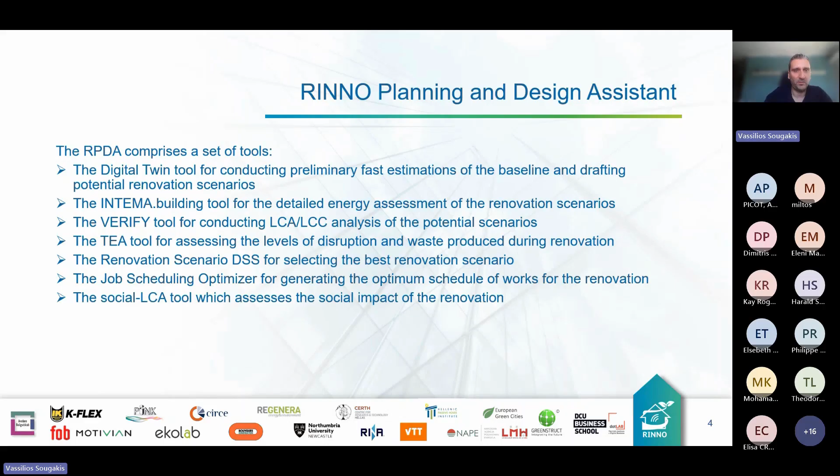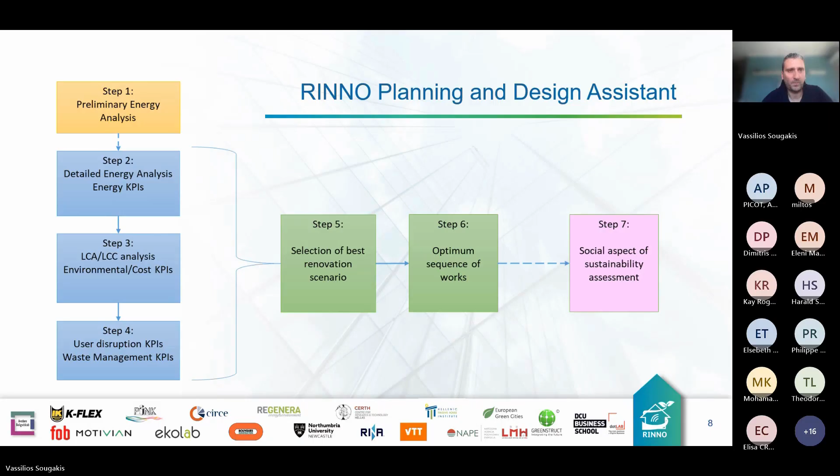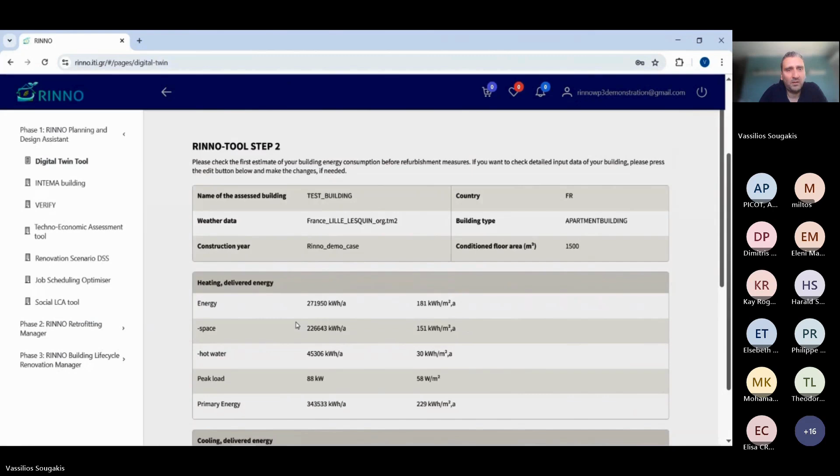This is a tool that has been developed by VTT, which is a partner in the RINNO consortium, and has been designed in order to provide some quick estimation of the building components by using minimal available data. So it has been parameterized in order to enter specific brief information, and it's able to deliver immediately, based on the parameterization for each country, some loads regarding the energy, the heating, cooling, energy consumption, domestic hot water, etc. So that was the first result.

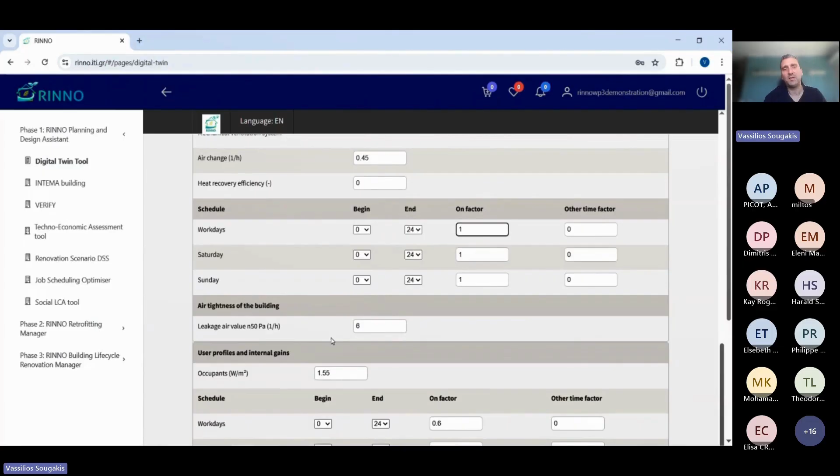As we're moving on, we can also click in order to change some parameters and give a more accurate description of the building, and of course obtain more accurate results. So we can change different parameters such as the window sizes, the schedule, the air tightness of the building, the air change through ventilation, as well as the occupant profile. Also the U values of the building walls, of the building components.

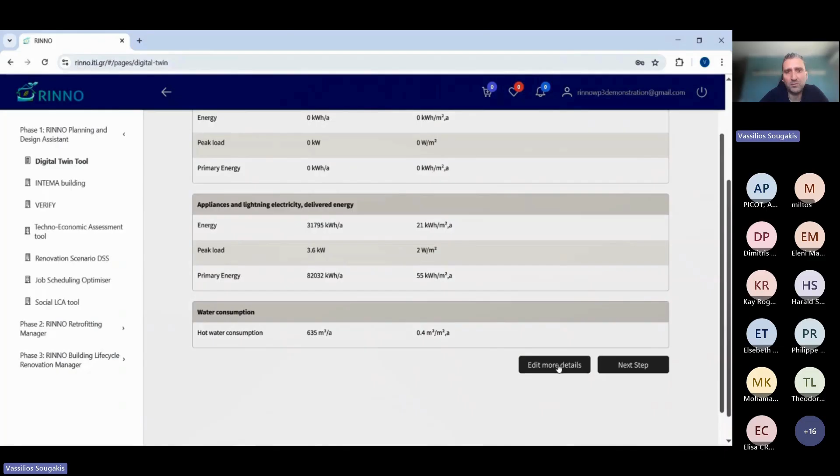And if we change that, we also get an updated result, which is more representative of the building under consideration. We can do this process and then save details, and this will lead to the update of these values here, of these key performance indicators. Here we can see the estimated heating and cooling load for the building. Once we're happy with that, we can proceed to the next step, where we can consider specific measures for improving the building performance and for generating the renovation scenarios.

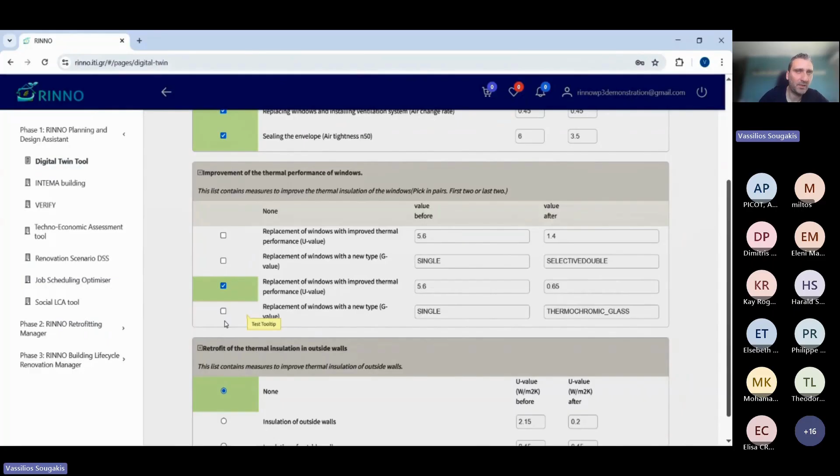So we have some predefined renovation measures, which we can select, and this will update the building and recalculate the performance under the renovated state. And then there's going to be a comparison between the performance of the renovation and the baseline of the building. Additional improvements may consider the hot water system, a PV, some solar collectors, as we see here, upgrading the HVAC system, etc. Also considering some auxiliary heating system.

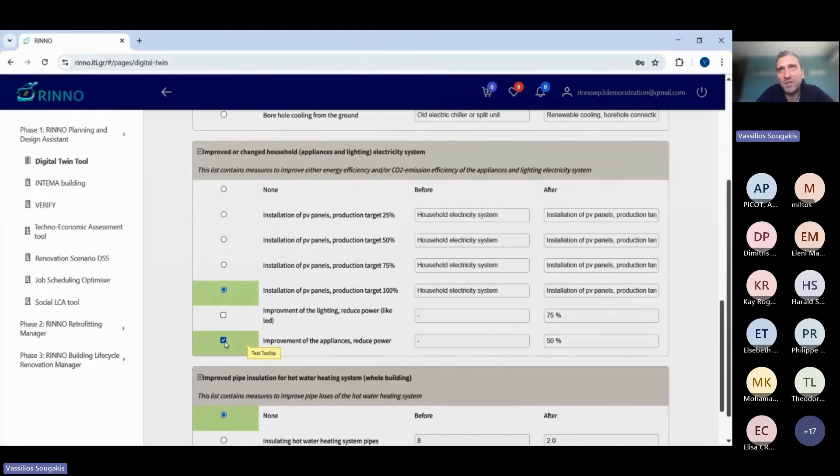So this tool has been designed in order to provide a quick estimation of the baseline condition of the building, as well as the renovation, using minimum data, which is basically what we have at a preliminary design stage, and we can get a fairly accurate estimation of the energy consumption of the building before and after the renovation.

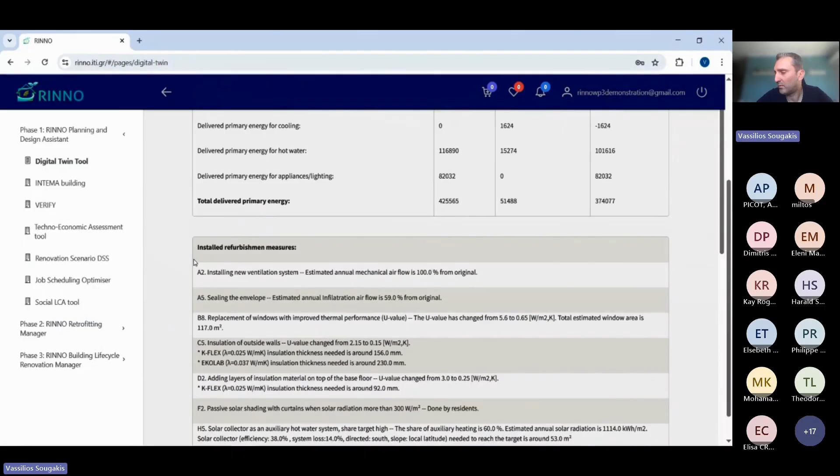I think the main strength of this tool is the speed of the calculation, the fact that we can quickly consider various renovation scenarios and various renovation measures and get an estimate of the energy consumption, and also the accuracy, which has been tested and evaluated during the implementation of the RINNO project, where we compared the results of this tool with the next one, which is the Intema building, which conducts the detailed analysis, and it has been shown that there is a fairly good agreement between these two software.

So using this application, we can have a quick estimation of the building performance, and we can have the figure where we can be sure, we can be quite certain that it is a representative figure.

Now, moving on, after conducting the simplified analysis, the preliminary analysis, we can then move on to the next tool, which is the Intema building, and this conducts the detailed energy analysis. So with the Intema building, the idea is that we first do the digital twin tool and we consider several renovation scenarios. Then we select the most promising ones and we assess them in detail using the Intema building tool. This is the layout.

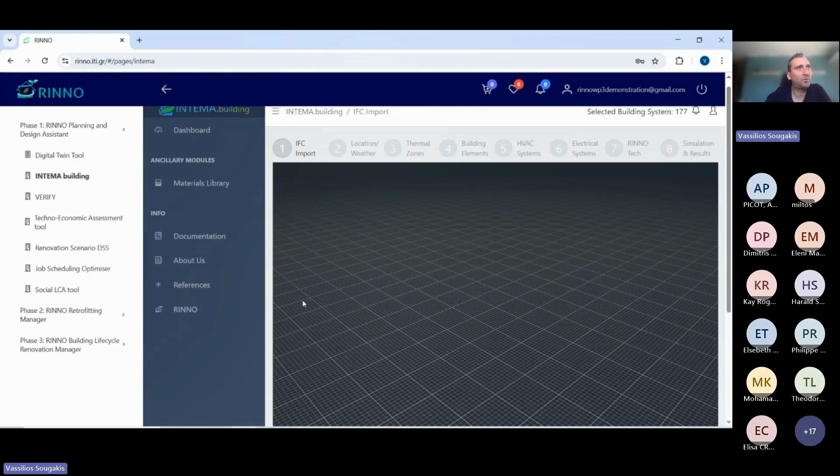We can access the tool again from the left-hand side of the platform. Here we have run a few cases where we have the baseline as well as a few renovation scenarios. By clicking on this button here, we can access the tool, and the first thing that we see is the screen where we can load the IFC model, and if we have a BIM file, we can upload it in order to conduct the analysis by using all the data from the BIM, which saves us a lot of time.

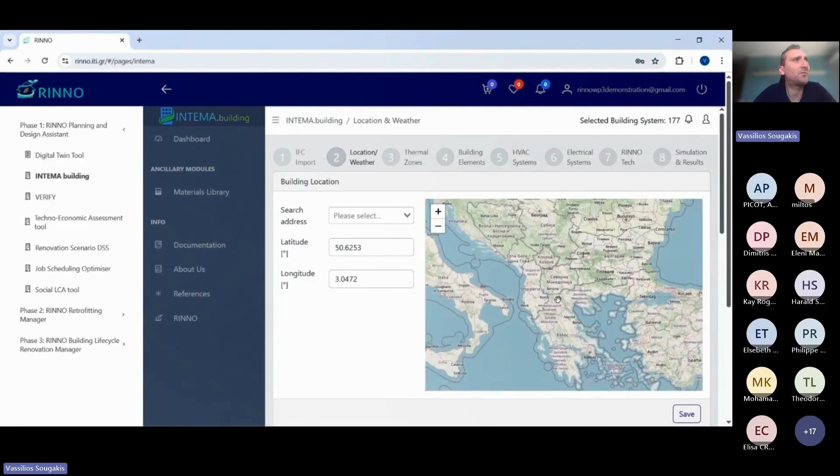Here we have a case from one of the demo pilots of the RINNO project. Once we're happy, we can upload it and move on with the analysis. It should be noted here that we can do the analysis using the Intema building tool regardless of whether we have a BIM file of our building or not. So if we have a BIM file, this will save us a lot of time by importing the geometry and the thermophysical properties of the building. If not, we can do this process manually.

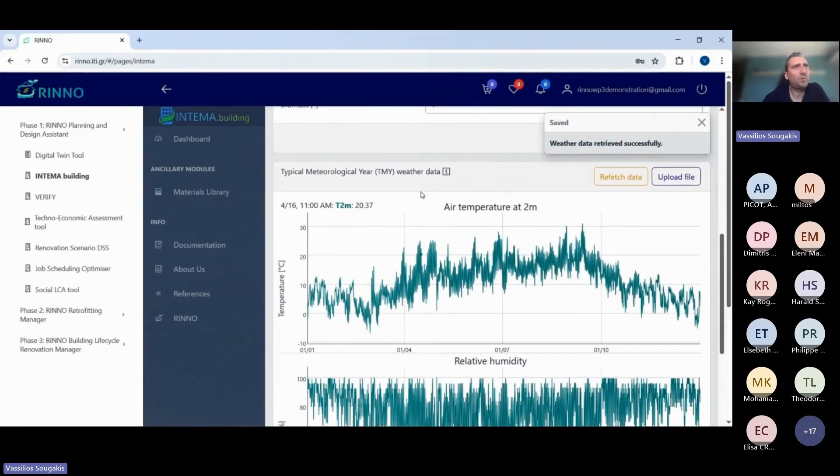Next step is we select the location. We have a pre-selected one, which is Lille in France. After selecting our location on the map or by entering coordinates, we can refetch the weather data. We can load the weather data, and we get a message that the weather data for this location have been uploaded successfully, and this enables us to conduct the analysis. Moving on to the next step.

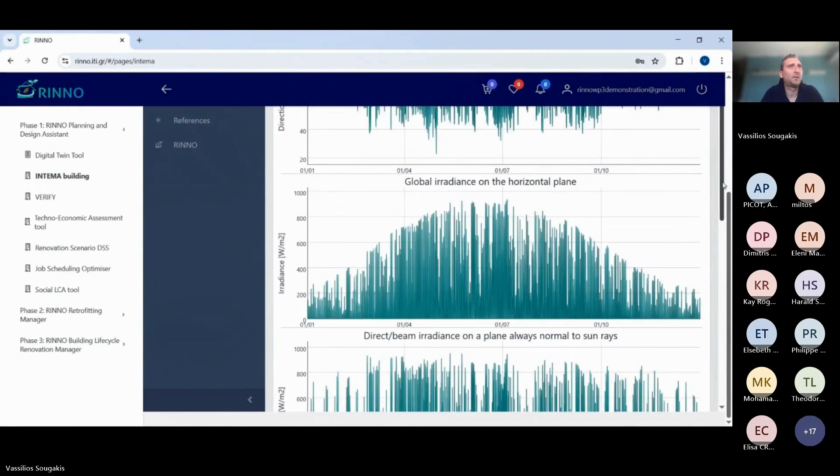We then set the parameters for the thermal zones. In this case, we can see them once we import from a BIM file. Also, we can make the screen larger. We can take out the left-hand side panel in order to make the view better, larger. And then we can edit. We can set a new zone, or we can edit the zone here. We can select if we have a single zone building or a multiple zone building.

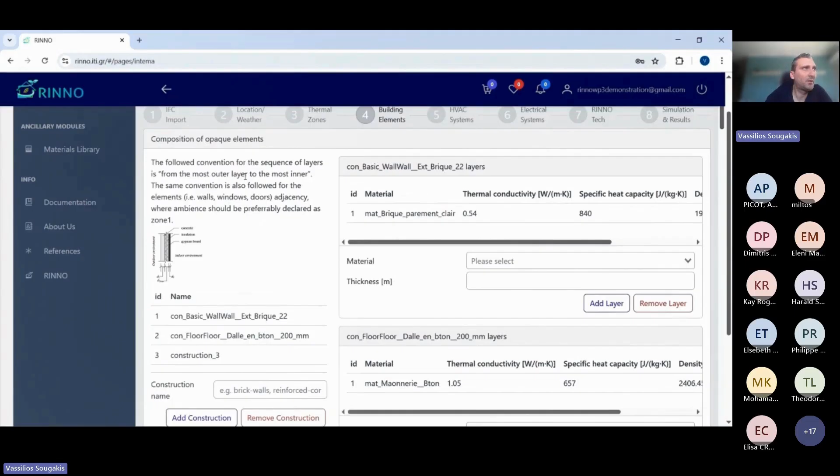This is imported from a BIM file, as well as moving on to the next step where we have the building elements. This is where we define the building elements for the case study that we're examining. So in this case, there are materials that have been imported from the BIM, and these are the defined constructions. So first we define the construction that we have on the building, and by constructions we mean the materials for the walls, the floor, and the ceiling slab. And then we define the walls.

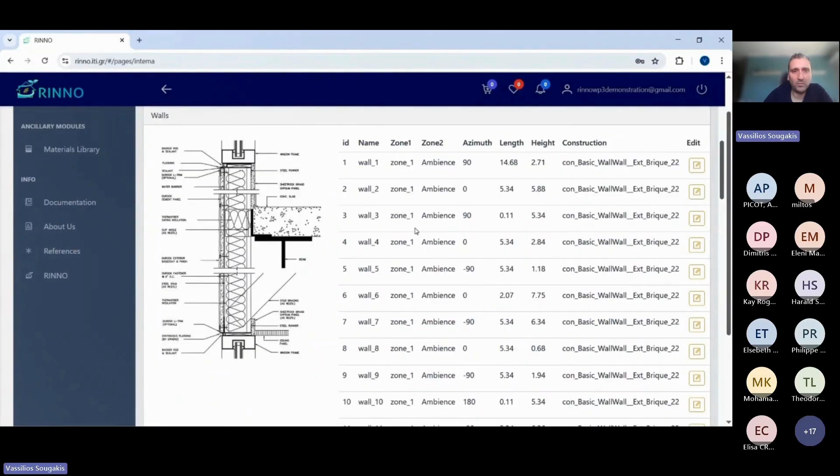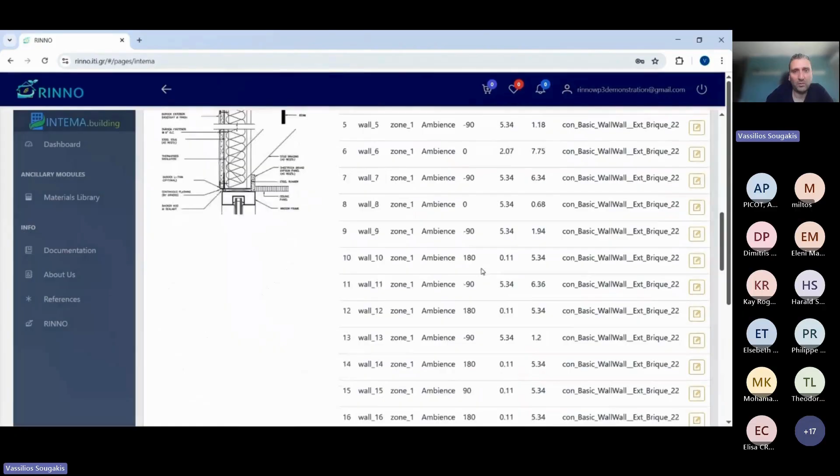So this is a case where this has been imported from the BIM file, but if we didn't have a BIM file, we could just define the geometry by entering the details of the walls. And then we can include information and assign the relevant construction. So the construction from the previous step is assigned to the building. As I said, we can also create a new wall and define which zones it is in contact with. It can be in contact with the air, the ambient temperature, or with an unheated space or a heated space where there's no heat transfer.

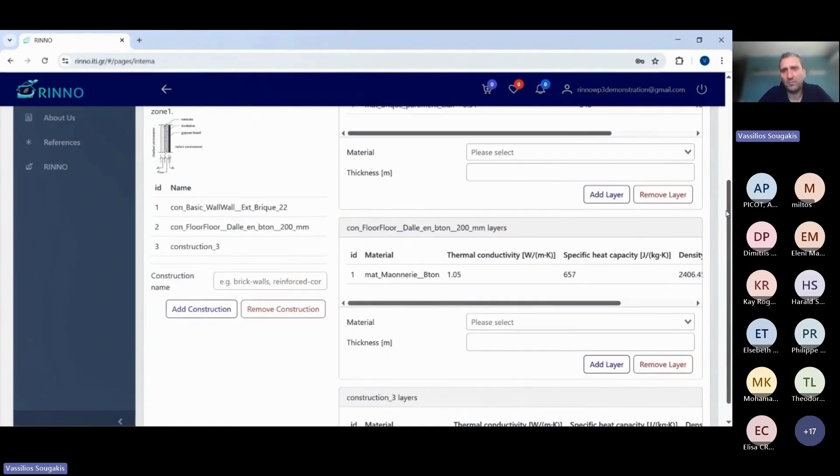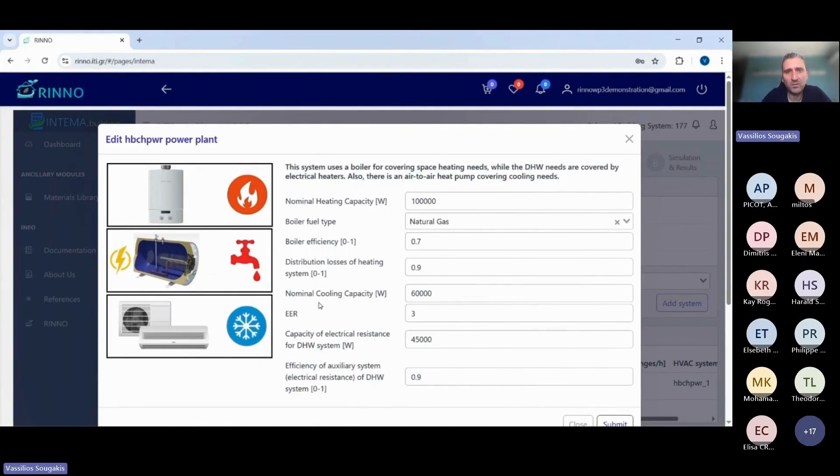And similarly, we do the same process for the windows, the roofs and the floor. We define the geometry of the building as well as the materials. In this case, we have defined the whole building envelope. Having done that, we're ready to move on to the next step, which is to set up our heating and HVAC systems. In this case, we're considering a boiler for space heating, domestic hot water is provided by electrical heaters, while there's an air source heat pump for providing cooling.

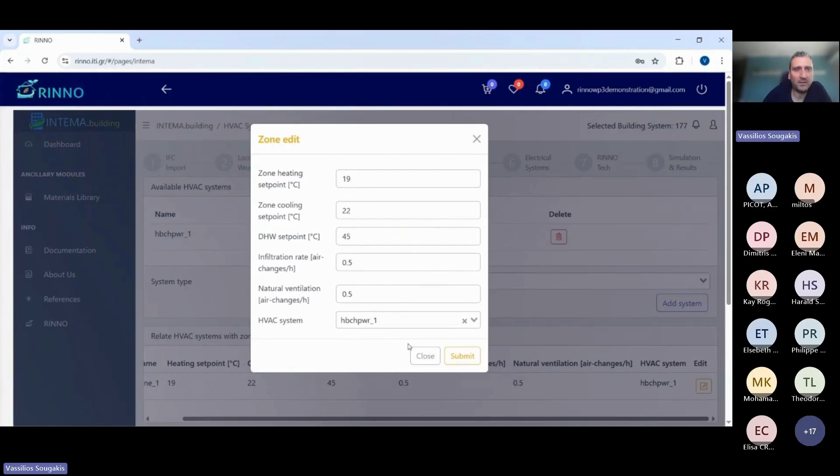Also, we can select and set up different combinations of HVAC systems for heating, cooling, and domestic hot water. And at the bottom, we also set specific information regarding the zone parameters, such as the cooling set point, the heating set point, the thermostat, infiltration rate, etc. Also, how many people are in the zone.

Moving on, in this stage I can also assign electrical systems, such as renewable energy sources, as well as specifications for the appliances. So we're defining all the electrical loads and electrical systems of the building. When we're happy with our setup, in this case, we can see how we can set up a photovoltaic (PV) system.

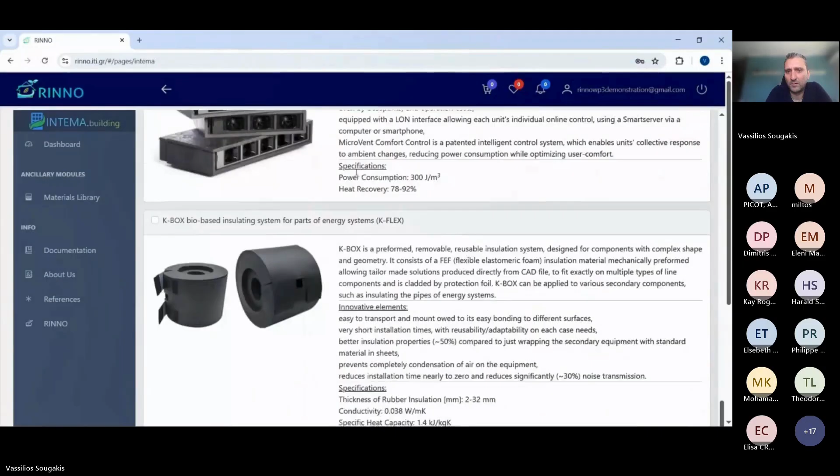And then we can move on to the next step, which, particularly for the RINNO project, includes the RINNO technologies, where we can select them and parameterize them in order to be considered for the renovation. We can see the different systems that have been developed in the project. We can select a few of them, and then, moving on, we can conduct our analysis.

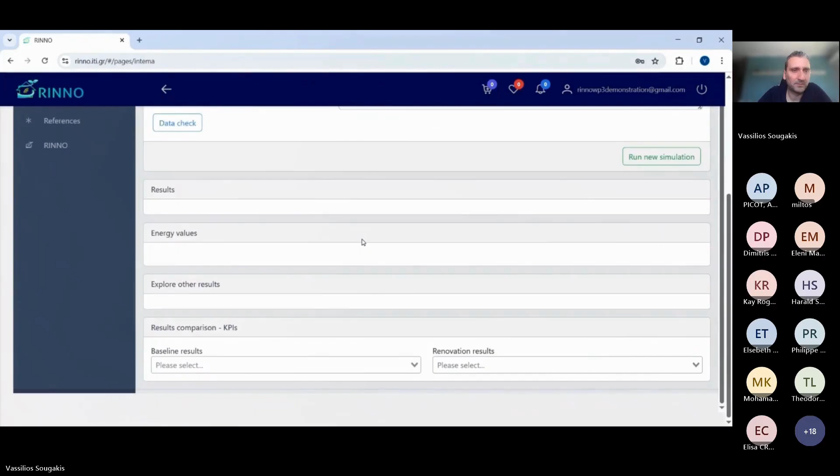Clicking on the left-hand side, we can click the simulation bar, run new simulation. In this case, we're loading some pre-loaded data for reasons of time restrictions. And we get the results based on how we define the building performance, the building operation, the thermostats, the heating and cooling systems.

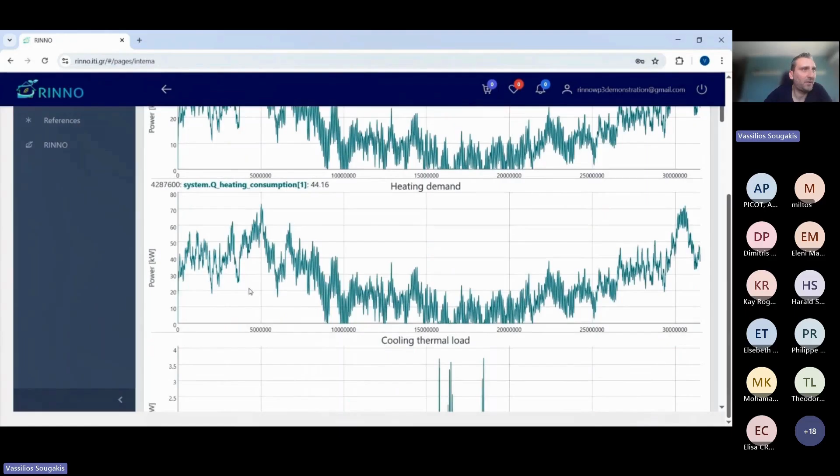This calculates the heating demand, the cooling demand, as well as, if available, renewable energy production, as well as the demand for domestic hot water, etc. And then it also calculates the KPIs for our buildings, such as the heating load and demand, cooling thermal load and demand, as well as domestic hot water.

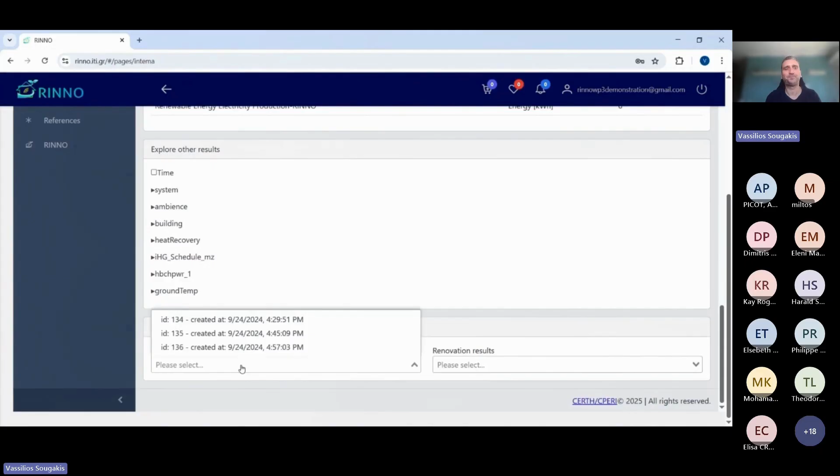And finally, we can also assess the different scenarios. So in this case, one is the baseline and the other is the renovation scenario. And we can see specific KPIs that have been calculated, such as the decrease of heating and cooling loads, as well as savings in primary energy consumption, heating and cooling consumption, etc. And these are the so-called energy KPIs, which are considered in the analysis, as I mentioned earlier.

All the tools of the RINNO planning and design assistance are working together in order to conduct not just an energy analysis, but a multi-criteria analysis, a holistic analysis for the renovation. And this was the process for the building energy analysis. Once we are happy with that, we can proceed to the next software, which is the Verify platform. Again, we can make the screen larger in order to view the results better.

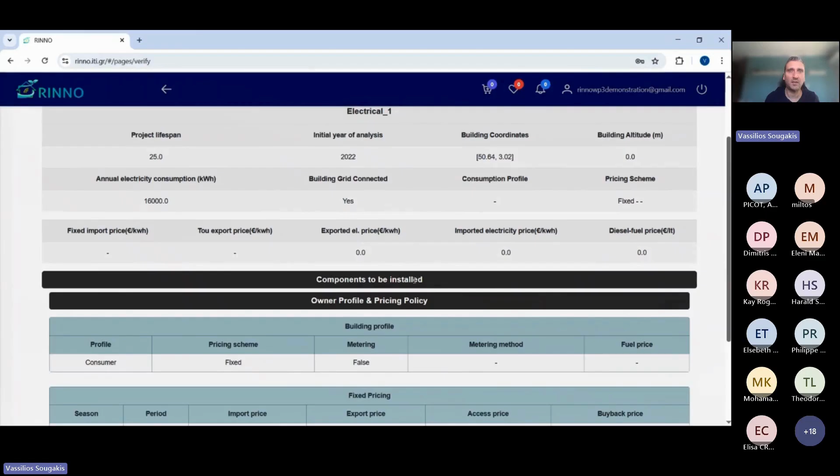So the way it works is, from the left-hand side, we can see the plans and the option to construct a full project. In order to conduct the analysis, we need to set up an electrical plan, which we see here. This considers all the electrical systems and consumptions of the building. We can review it first, and then we can also edit it. So we can set the project lifespan. This includes information such as the project lifespan, the year of the analysis, and the latitude and longitude of the building.

Then we can define some renewable energy systems, such as a PV, which we do here. This involves setting the type of the PV material, the mounting system, as well as the tilt angle and the azimuth. Similarly, we can also set up a small wind turbine, or we can also include some batteries.

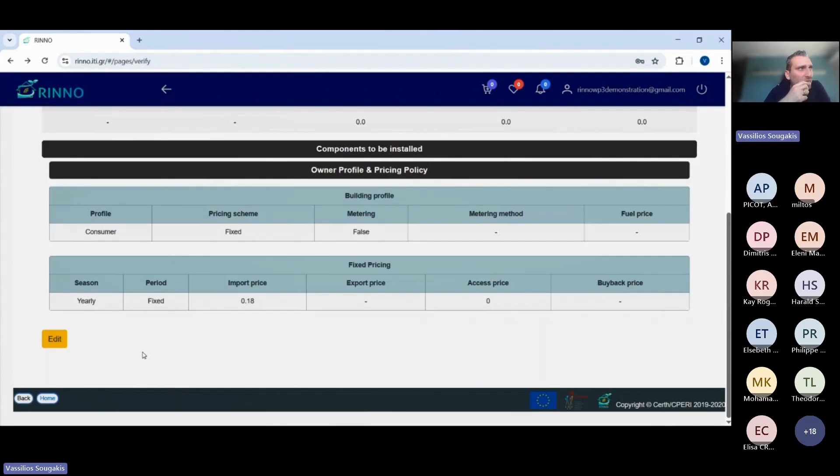So after the electrical plan, which involves all the electrical appliances and electrical consumptions, we also set up a thermal plan, and this involves information regarding the thermal components and the thermal consumptions of the building. First, we set up the name of our plan, and then we have the floor. We set up parameters such as the floor surface of the building and the floor height, and we set up the construction, and then we consider the different heat systems before and after the renovation.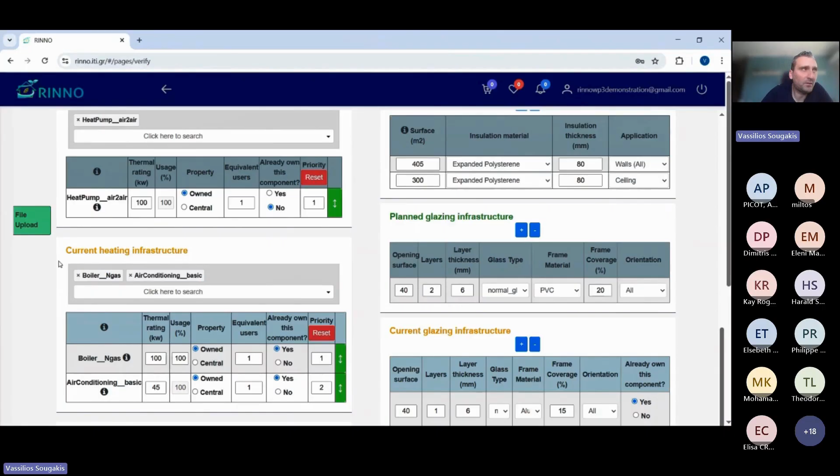Here we have set up basically what we were looking at earlier. In the baseline, we have a natural gas boiler for domestic hot water, and then an air source heat pump for cooling. We're also setting the equipment for heating and cooling before and after the renovation.

So we're defining the heating systems before and after the renovation, as well as the passive components, which you can see on the right-hand side, which involve insulation, glazing, as well as any storage for domestic hot water. In this case, we're considering double glazing after the renovation. Before the renovation it was single glazing, as well as insulation on the walls.

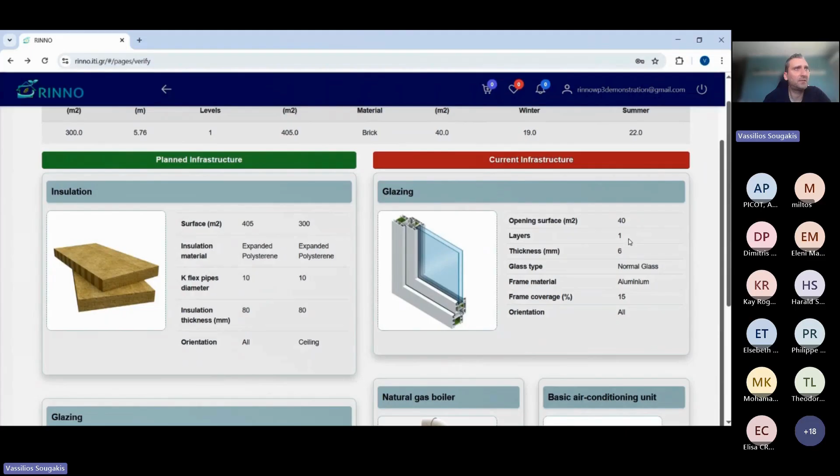The tool for all these components has a database where we have values for the life cycle assessment and life cycle cost of these components in order to conduct the LCA and LCC analysis. So we can review our scenario, the renovation scenario. We can see on the left-hand side the renovation scenario, and on the right-hand side the baseline, the components that were still on the baseline. We can review it, and also we can make any changes if needed.

So the last step is to define the investment plan, which is defining some indicators, some crucial inputs regarding the economic factors, such as the VAT, inflation, electricity tax rates, the weighted average cost of capital, etc. Also, we can define if there is a loan or not, and if we need to also purchase the land that we are doing the renovation on or not, as well as additional costs that can be included in the life cycle costing of the renovation.

Moving on, we can construct the renovation scenario, comprising the electrical plan that we conducted, the thermal and the investment plan, and then we can conduct the analysis. So once we click develop scenario, we can see it's included in this full project. So by following these steps, we're constructing a project, and then, in order to do the analysis, the VERIFY tool is requesting data from the previous tool for the energy use phase of the building, and we're ready to conduct the analysis.

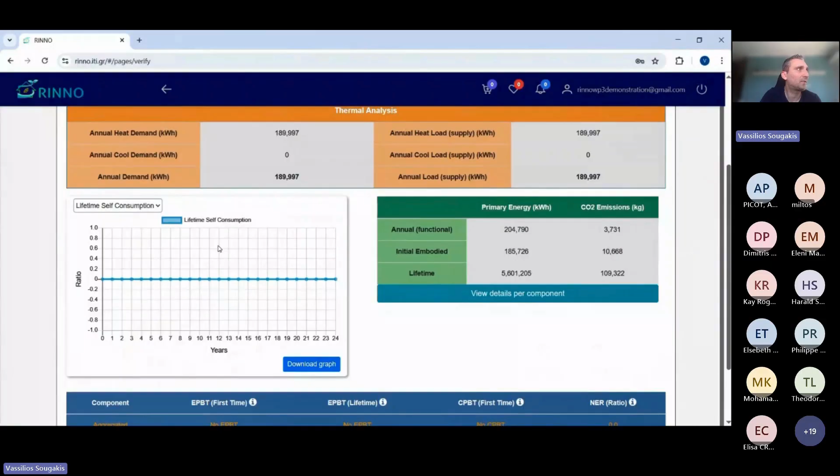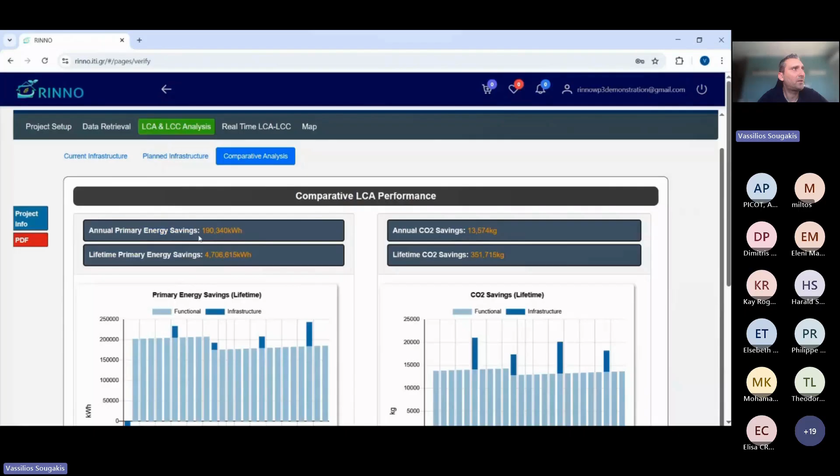So the setup that we did in the previous stages considers mostly the installation stage and all the embodied energy and carbon for the installation stage, and then we request data for the use phase of the building. And by clicking Run Life Cycle Assessment, we can see the life cycle assessment of the building during the baseline, during the renovation, as well as a comparative analysis on the primary energy savings on an annual basis over the lifetime, as well as CO2 savings that are expected from the renovation during the lifetime of the building, as well as a few graphs that facilitate the assessment.

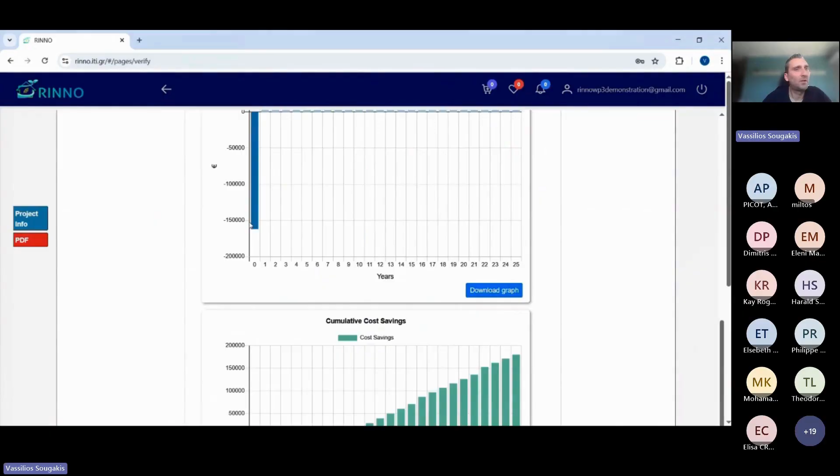Following the same process, we conduct the life cycle costing, and here we can see some cost analysis, the life cycle cost, initial investment, operational cost, etc., for the existing condition of the building if nothing changes over the lifetime that we're considering in our analysis, or during the renovation, where we see again the initial investment, the life cycle costs and the operational costs, and then a comparative analysis which shows us some financial indicators such as return on investment, the initial annual cost savings, investment payback time, etc.

So following these steps, we have concluded the analysis, and we can send the KPIs to the next tool of the RINNO planning and design system. The next tool in the process is the techno-economic assessment tool, and for that I would like to ask Jairis if she's available to do the presentation.

Hello, yes, I am available. Hello, everyone. Okay. Elisa, could you please make me a presenter so I can share my screen? I can do it here.

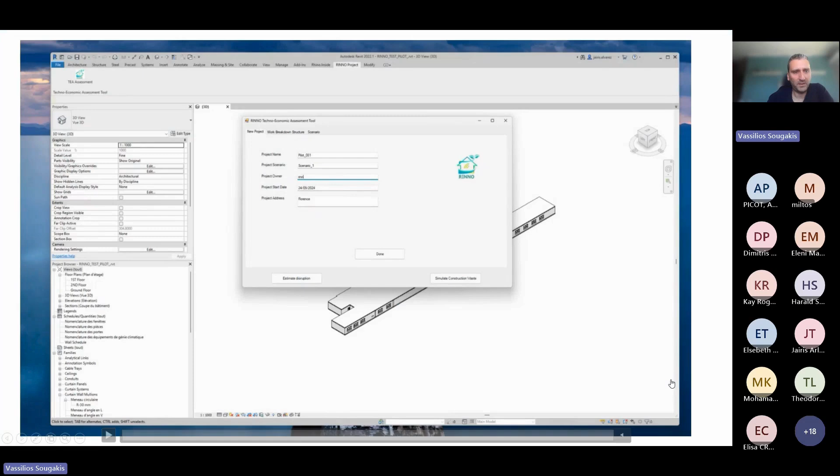Ah, yeah, okay. Perfect. So basically this is a desktop application where, from the left-hand side, we can access the tool, download it and then use it as a plugin in Revit. I have included it here. Okay, perfect. So in here you can see the tool, which is a plugin in Revit. You can see here that we have a case study. So a one floor building, with a flat roof and windows. We tried to make it as simple as possible so we can show you.

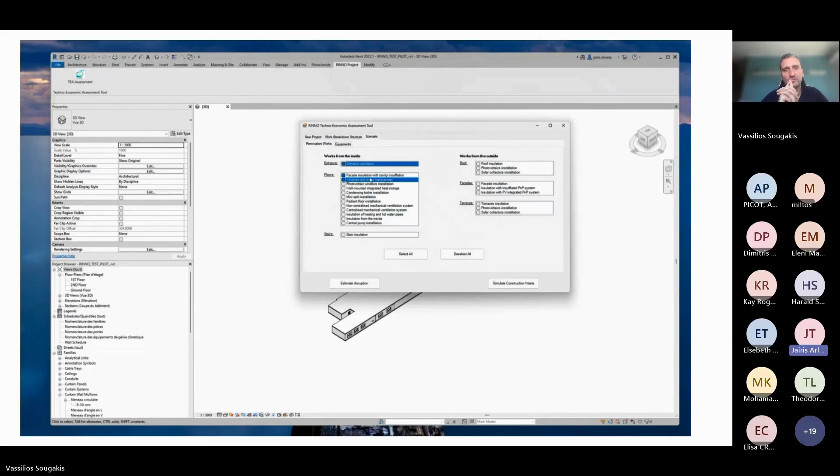Okay, then we click on the TEA tool. This will open a window in which you need to choose the name of the project, the scenario, and the start date and the end date. You also need to choose the scenario. So for example, in this one, you will have the facade insulation, photovoltaic panels, among others. Then you click on the estimated disruption and the simulation of construction waste, and it will give you an Excel file, which later in the video you will see. The most important thing when you are creating a new project is to choose the correct date, because the tool will read that date and also will read the elements from the BIM.

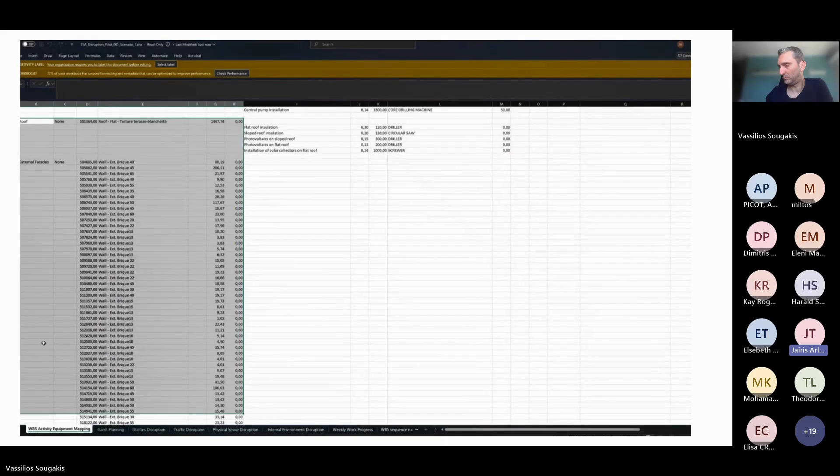So here you can see the Excel file, the project name that we have already pre-selected before, all the elements from the BIM model. So you can also do further calculation with this. We see the activities and also the equipment related to each activity. You can see also the difference on the different element for each part of the project.

So the roof, then on this side you will see the utilities, and obviously here there is a minimum impact because we have photovoltaic on the roof, facade insulation, windows and door, so you don't have a lot of physical disruption. Mostly the physical disruption will be for the site preparation, because as you know, we have a space where we need to put the materials. Then this one is more about the activities in each floor and how many rooms it has.

And this one is the Excel file for the waste. It tells you the waste that was generated in the project and also according to the date. So you can see here the KPIs of the waste, the average workers, and again the activity sequence.

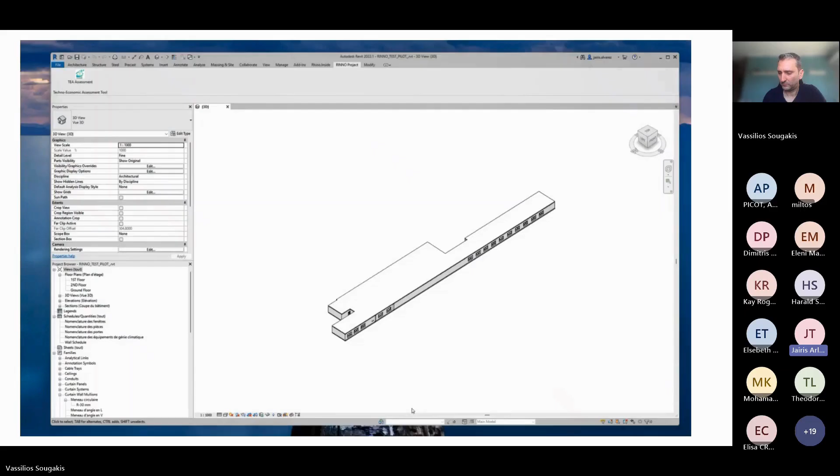And this is the TEA tool, and it gives you a preliminary stage of how long a project can take, and also a way to talk to the stakeholders or also the occupants on the building, so they are aware which days the renovation is going to take place and what is the impact of the disruption from 1 to 4. Thank you.

Thank you, Jairis. So, yes, I am done.

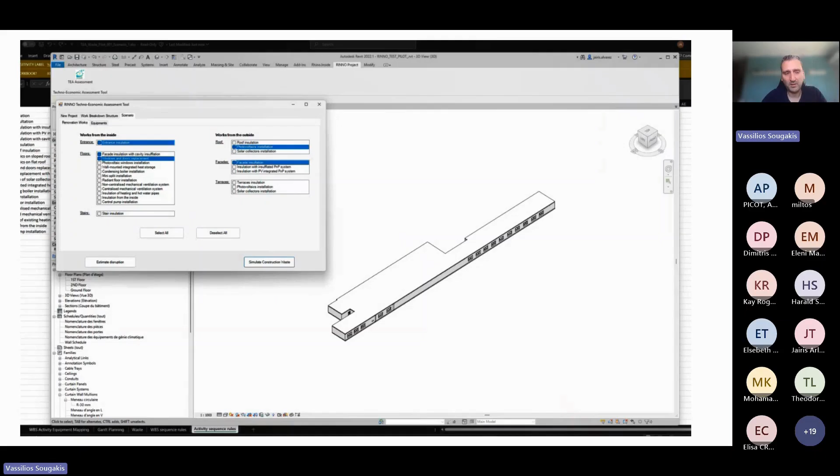Using the techno-economic tool, which is, as far as we know, a unique tool so far. There's no similar tool that can do these calculations of the user disruption and waste management. And we use these results of the analysis, how much disruption is expected during renovation and how much waste, for the selection of the optimal renovation scenario. And this is done in the next tool that we will see, which is on the left-hand side here. It's called the renovation scenario DSS. So this is a decision support system.

Basically, for different scenarios, all the analysis that we did using the previous tools, all the results are loaded in this tool here, and we can rank the scenarios. We can see all the results for different indicators. The indicators are categorized in different categories. We have environmental, energy, cost and financial, and user disruption. We have different KPIs in each category, and the user may also select which key performance indicators are more relevant. If they want, they can remove several key performance indicators in order not to be taken into account in the analysis. And also we can change the category weight.

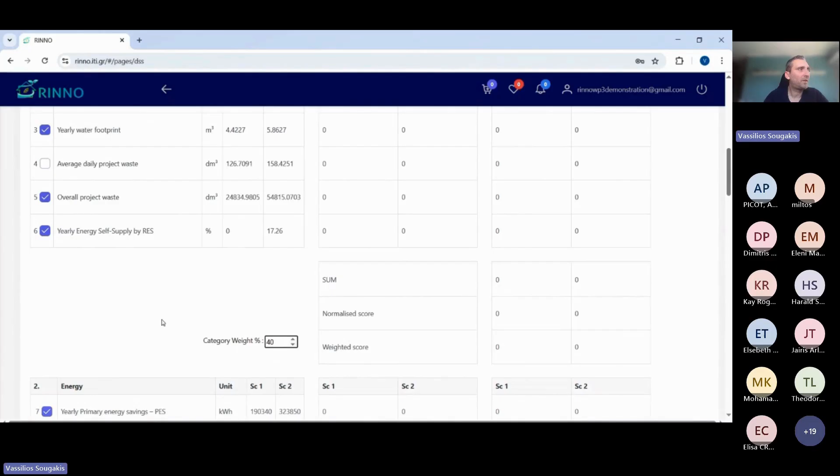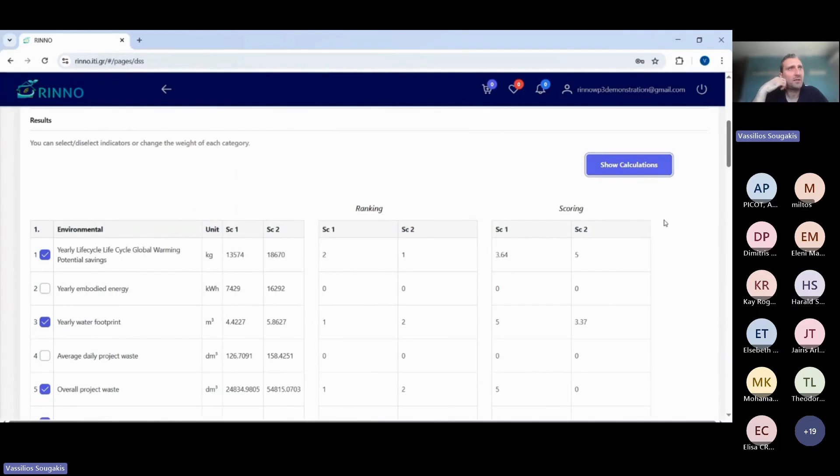So if, let's say, the cost financial is more important, they can apply a higher weight. If another is not so important, you can have a lower weight. So in this case, we have increased a few weights and reduced another weight, basically to capture the user preferences. So once the user reviews the results, selects the KPIs and the weights of the categories, they can click show calculation, and it will compute the result.

Basically, the software is doing a ranking and scoring of each scenario and the key performance indicators, and computes a complete score by which it selects which is the best scenario according to user preferences, as well as a description of the renovation measures that were included in this scenario.

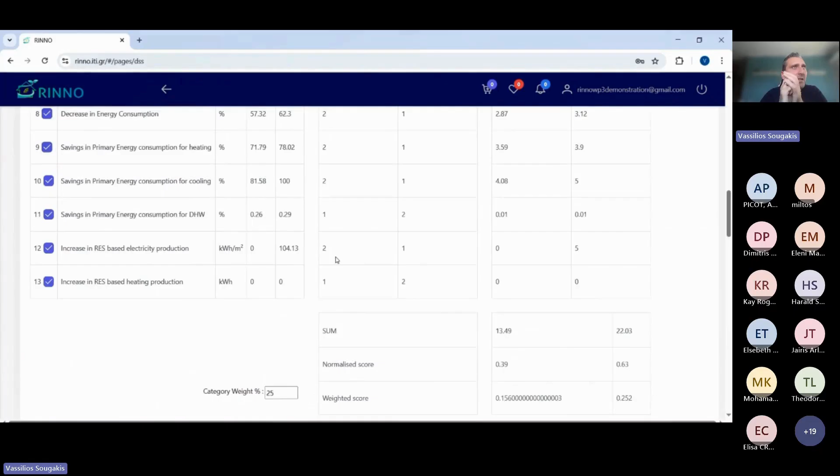If they change their mind, they can go back, consider additional indicators if they want to consider all of them, and change the weights of the categories, and then they can recalculate. They can recalculate the scenario by initializing the values first, and then clicking the button for show calculation, and then it computes a different score based on now all the KPIs and the new weights that the user may have considered. So in this case, using different preferences, this changes what the optimum renovation scenario is. Once the user is happy with this analysis, they can proceed to the next component.

So what we have done so far is we have applied all the process using different tools for the energy analysis, lifecycle assessment, lifecycle costing, and user disruption and waste management in order to select the optimal renovation scenario. Now, for this scenario, we're moving on to the next tool, which is the job scheduling optimizer. Using an automated process, we are able to conduct a preliminary schedule of our renovation. So in this case, we fetch the RINNO scenario.

So we are loading the scenario that was selected previously as the best renovation scenario. And what it does is that it fetches from the database all the jobs that are considered, along with the job specifications that are preloaded in the previous tools that were used. So this is information that comes from other tools.

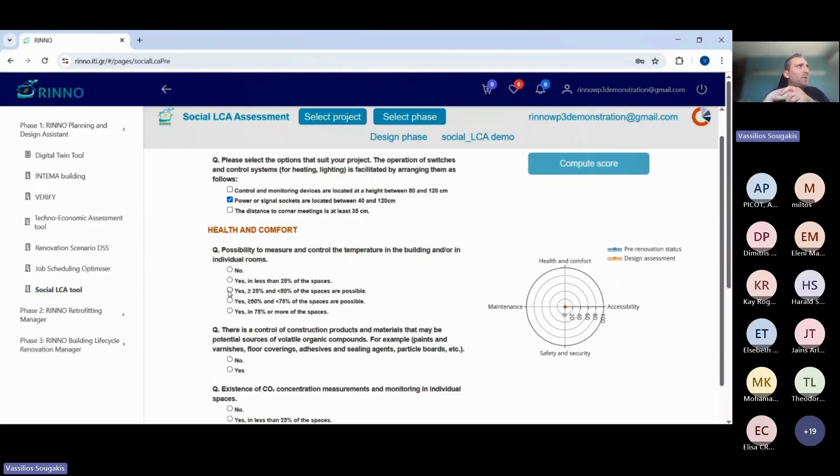So the social LCA assessment includes some parameters, some criteria of the building in terms of accessibility, health and comfort of our proposed renovation. Accessibility includes information on power and sockets. For health and comfort, if there's a possibility to measure and control the temperature in the building, whether there are potential sources of volatile organic compounds, the existence of CO2 concentration, as well as the humidity inside the building, as well as information on noise level, the daylight factor, etc.

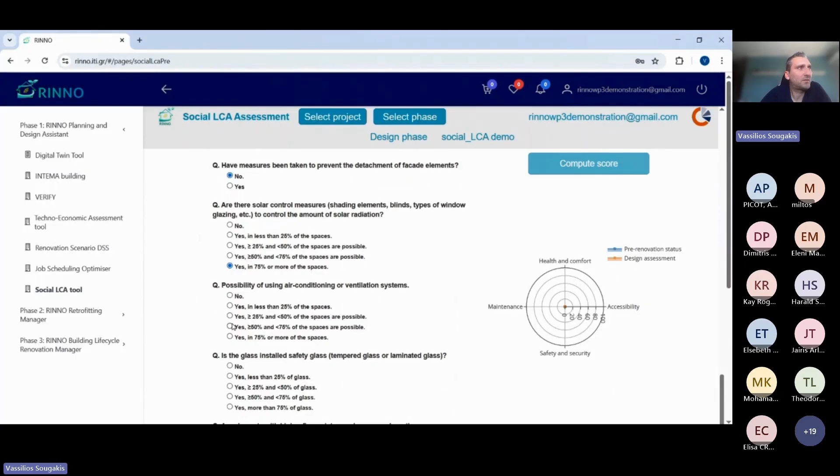In addition, another category that is assessed is the measures regarding safety and security. So whether there have been measures against the detachment of facade elements, whether there are solar control measures for thermal comfort, whether there's possibility of using air conditioning and ventilation systems, whether safety glass is installed, fire resistance measures with higher fire resistance and load bearing capacity, whether this is a higher reaction to fire class than required by regulations, and whether the building envelope exceeds the impact resistance to protect against vandalism.

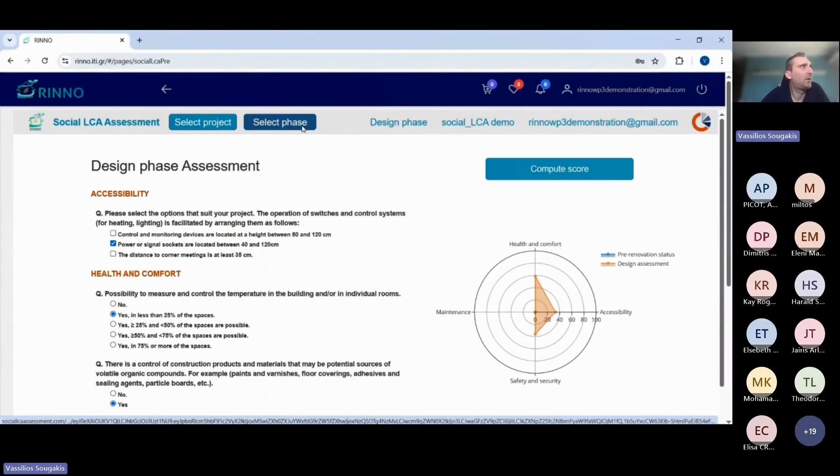So by clicking and setting the parameters for each one of these categories and each one of these KPIs, we can compute the score and assess the social assessment score at the design stage. As this is the design stage, there's no score about the maintenance. We can then move on with the analysis: let's say the renovation has been conducted, we can do the analysis of the same building and the same scenario, but after considering the measures that have been actually implemented.

So again, we're considering indicators regarding health and comfort, like volatile organic compounds and daylight factor, and regarding safety and security, again whether there have been measures for detachment of facade elements, safety glass, as well as parameters regarding the fire resistance of the building components.

And depending on these parameters that we have set, we can compute our new score, and it gives us the comparison between the before and after the design stage of the renovation and the actual implemented renovation to see how our building is performing in the social LCA.

So this is an innovative tool. Again, as far as we know, there's no similar tool developed in the market. It is based on a methodology from the relevant ISO standard. And this can be used to facilitate the renovation, to take into account social aspects, which are not normally accounted for when conducting conventional renovations.

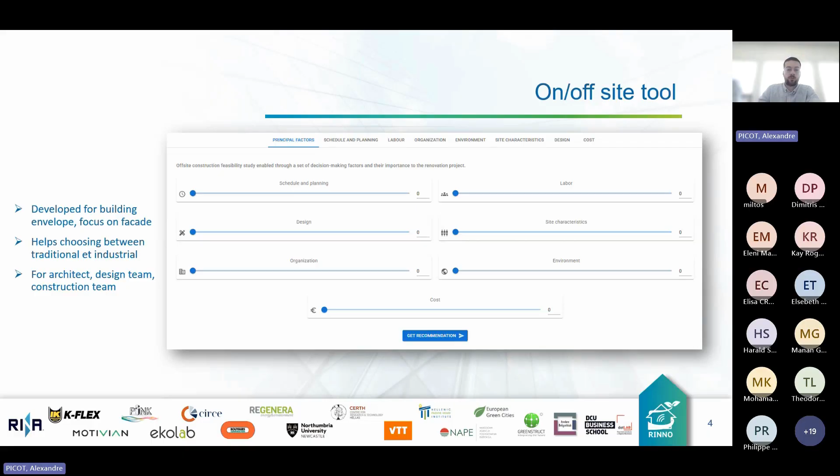Then you click on Get Recommendation, and you start going a bit into detail for each of the 7 factors. You have 73 parameters in total. For example, on schedule planning, you have 6 factors, but they can go up to 13. And for each of the 73 parameters, you have 6 options. You can say, for example, the early decisions are not applicable to my project. And you can go from strongly tends to build traditionally to the opposite, strongly tends to industrialize, for all of the 73.

So it's a complete approach, but it has been summarized to be clearer to the manager on site. Then when you have selected all the answers to these questions, you see at the right a weighted score, a global recommendation on whether the tool recommends you use off-site or on-site. And you can have more info if you want for each of the 7 factors, and it explains why the graphic on the right is like that.

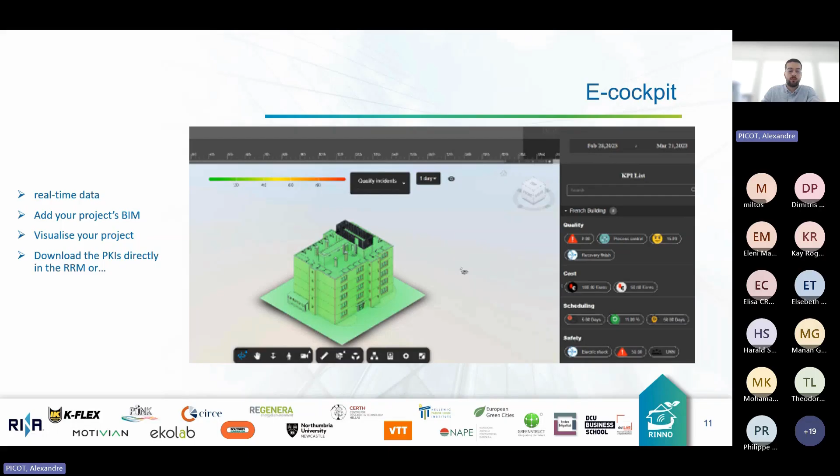I told you, you can download the data from your construction site directly to the RRM, but you can also add them if you don't have anything automated inside the e-cockpit. So first, of course, you log in. You have here the landing page. So you click on project data for KPIs. Right here, you will select the project, like we said before.

As you see, you have forms for each KPI. And we will see right now a form. So right here, you enter the data that will later be transformed into KPIs. You can say the date it was raised, the date it was solved, so we can see how much time it took to be solved, the cause, the stakeholder involved, and for example, the location or the status. Is it solved or not? Once you have included the data you need, the KPIs automatically calculate themselves.

So now you see a page with a few more data to have a better example and better idea. And right here you see the KPIs, the first of the 15 KPIs that are displayed and calculated here, on the same platform that you see right above. And you can see, for example, for the safety incident, the occurrences and the week it happened. And of course, you have this for the 15.

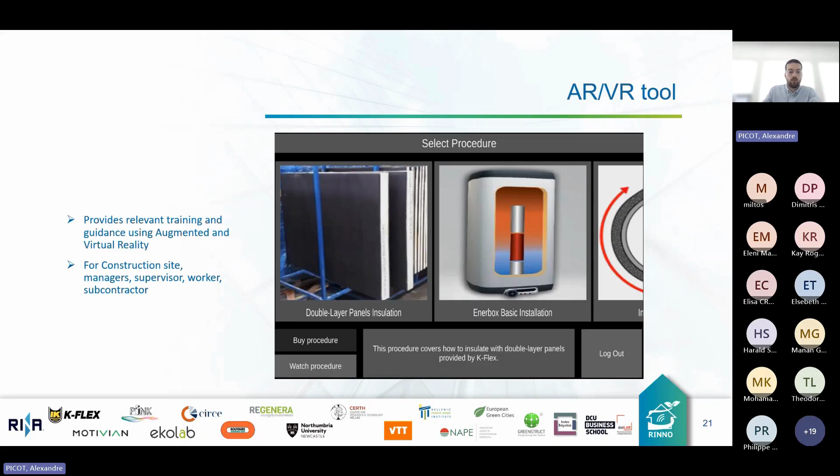And if you click on one, for example, the double layer panels insulation, you have all the steps you need to help you to prepare and to install it on site, of course. You have, if you want, photos of how it's done. You have text descriptions. And you have, like you see on the right, animated videos doing the task for you, for every task, from the beginning to the end of the task.

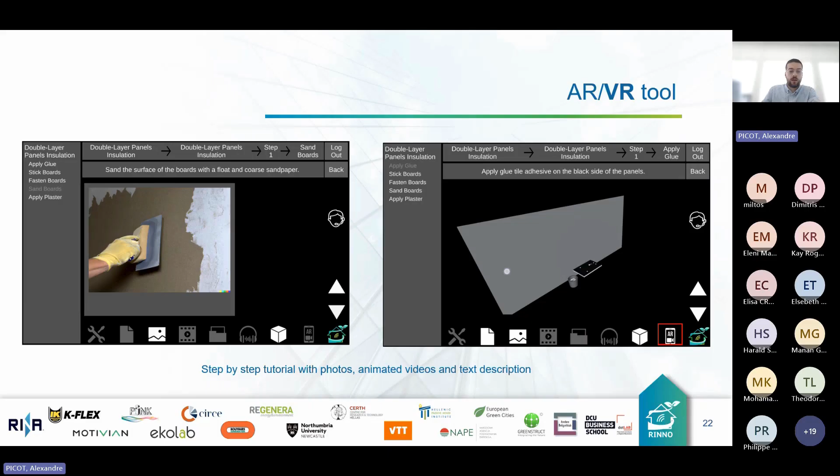And you also have an AR, so augmented reality tool inside this one. You can see with your phone how you can do the task in real life, and you can place it wherever you want. So probably it's better to put it where you want to install it, to see in real life, in real time. And of course, you can move it and place it wherever you want.

And that was the last tool of the RRM. And I will let Christian talk to you about the 3D robot.

Thank you, Alexandre. So as Alexandre mentioned earlier, the 3D printing robot is detached from the RINNO suite, as there are some further works to be done in terms of data, and especially the routing of the robot that can normally be issued from the BIM model, but currently it was not done within the RINNO project, but a further development could be done.

So the idea was to test on the French demo a robot that is able to print polyurethane foam automatically based on a movable scaffolding. And the robot was fully automated and automatically moved the scaffolding according to the trajectory that was programmed.

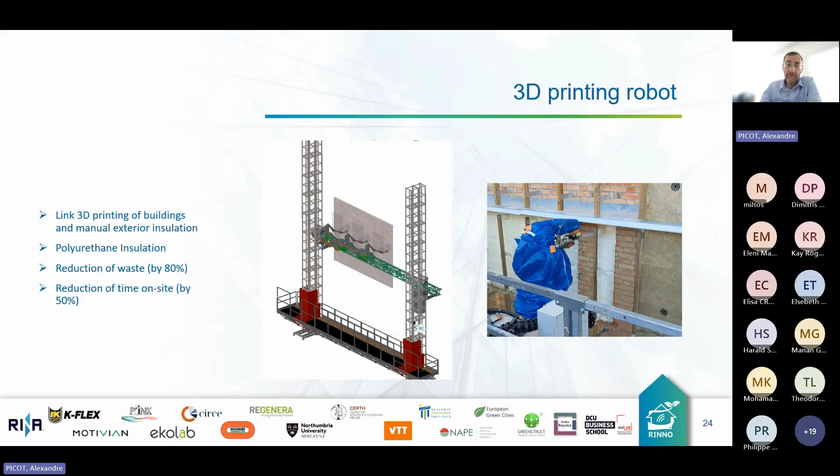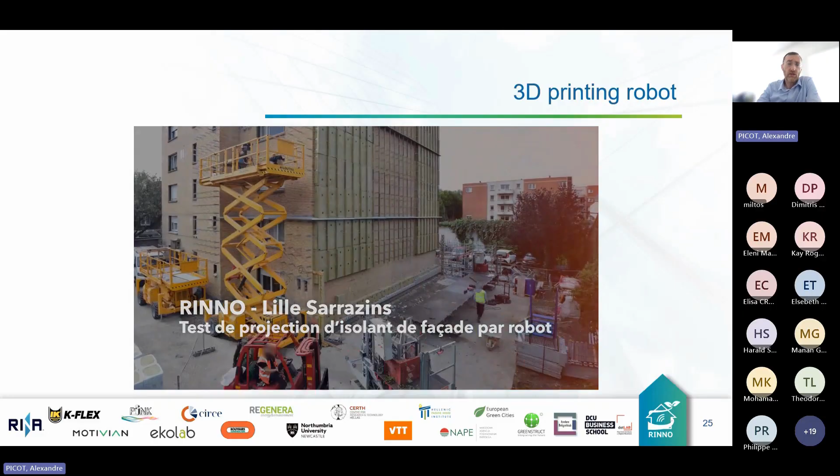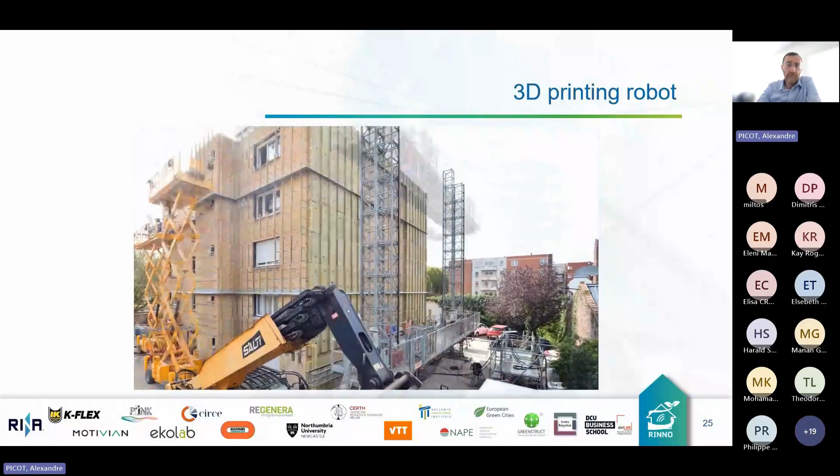So just to give you an overview of how it works on these short films, the idea was to first install the movable scaffolding, which was, I should recognize, a little bit oversized, but anyway, we did this exercise with this type of movable scaffolding, which is very useful, and you can see already the first printed part of the materials, and then the robot doing the printing, and at the end automatically all the wall was done from the bottom to the top.

And we successfully finished these tasks, and now we are developing a further solution with a robot again to take the experience of the RINNO project and to develop further applications for 3D printing in external insulation. So that's it from our side. Thank you.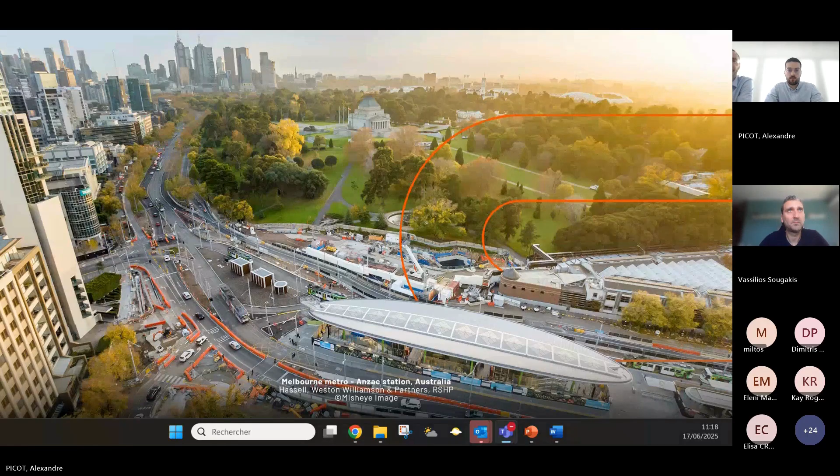If you have any question, please don't hesitate. Thank you, Christian. I think we can discuss questions later. So I will proceed. Share my screen again. Let me know if you can see my screen. Yes, we can see it, Vassilios.

Okay, great. So we're moving on to the final component of the RINNO suite, which is the component regarding the use phase of the building. It has a set of tools for monitoring the condition of the building after the renovation is completed, as well as additional tools that facilitate transactions and the use of the RINNO platform as a one-stop shop where we have a marketplace and a facility for contracts to facilitate transactions.

So we can start with reviewing the first component. First, again, we log in to the platform, and then access from the left-hand side the phase 3 building lifecycle renovation manager. This includes first a renovation roadmap, which is an implementation of a building renovation passport that we conducted for the purpose of the RINNO project. So using the tools we saw earlier for the design stage, these are all information from each of these tools.

We are calculating and providing a renovation roadmap with the renovation that was considered in the analysis, but now with two proposed renovation paths, in case the building owner does not have the financial ability to conduct all the renovation. So we're doing the renovation in steps where we see some parameters regarding the primary energy consumption, energy, CO2 emissions, etc. in each step, as well as the renovation measures for each of these steps.

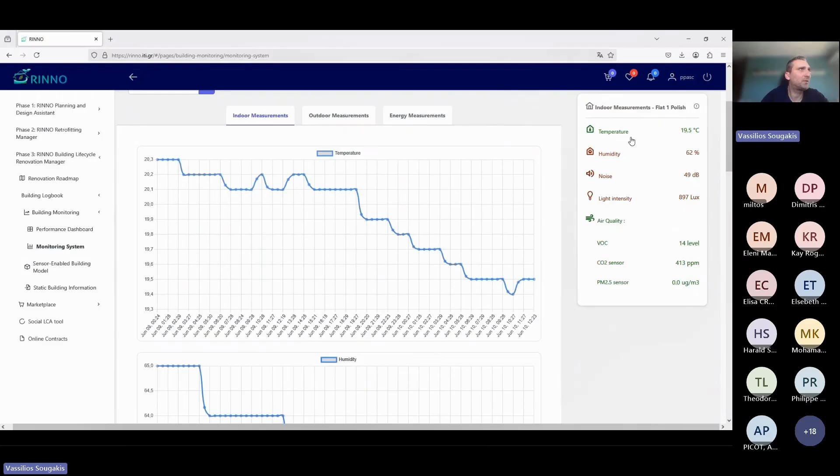The next function is again the monitoring system, which basically shows information on a specific period of time that we can set, and it shows information regarding temperature, humidity, internal building conditions, let's say particulate matter inside the building. It considers indoor and outdoor measurements as well as energy measurements. We can do the same for other buildings as well. We can select a different building, and we can see the measurements from inside that particular building.

And on the right-hand side, we can also see whether these readings are inside some acceptable limits, where they're shown as green, or if they are red, like the temperature here, it means that the temperature can be high, and then the user can see this information and take some actions. So the platform is used, as we can see, for different flats as well, but the idea is that it's also used for alerting the occupants.

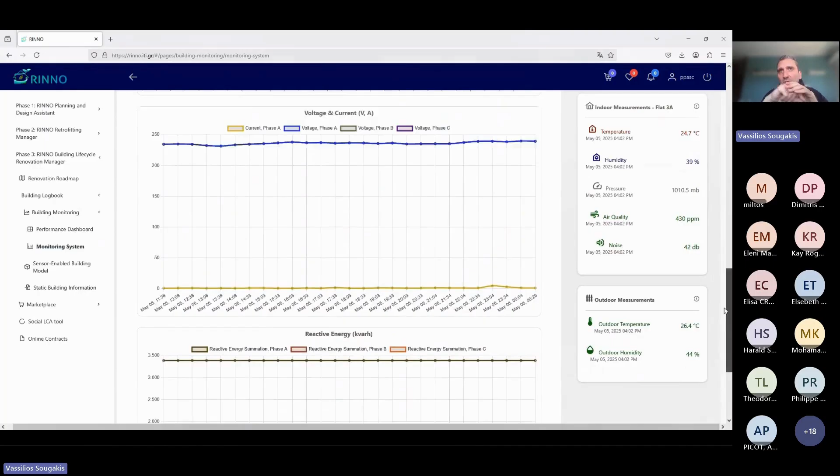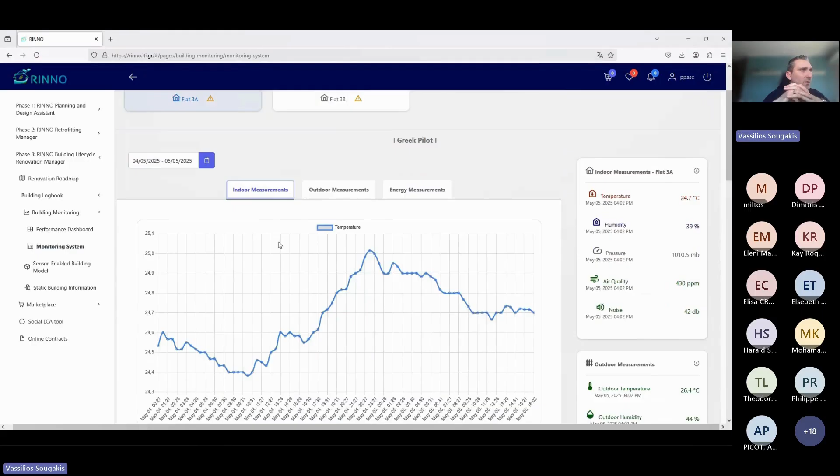If, for example, we have a very high reading for CO2 emissions, the occupant can review it, and it will be flashed as red, and then they can open the windows, for example. Again, here we can change the range of when we want to see our readings. We can see historical figures for indoor and outdoor measurements, as well as energy measurements.

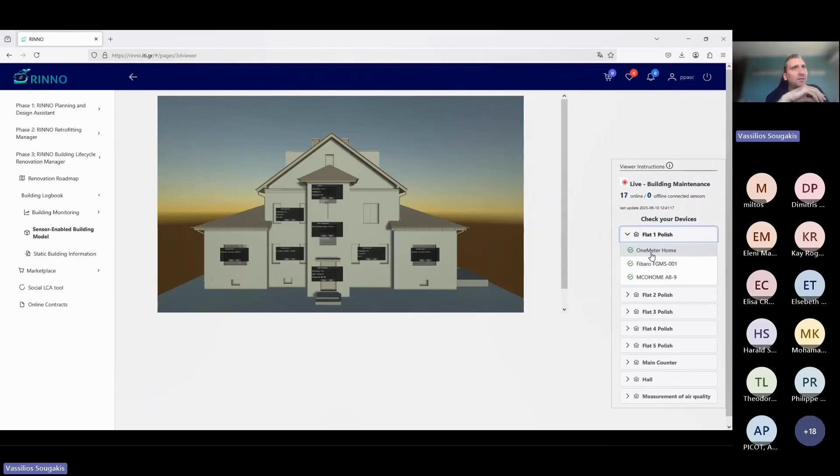We can review this information, and then moving on, there's another component, which is the 3D viewer of this information. So here we saw the different flats. We could choose the flats and see historical data in the previous screen. Now we can load the demo, and we can see the data using the BIM model.

It provides an immersive environment, and it's also better to identify the flat we want to evaluate, and we can see the real-time readings for that particular flat. So this is another way of visualizing and facilitating the user to assess the real-time performance of the building, using real-time measurements.

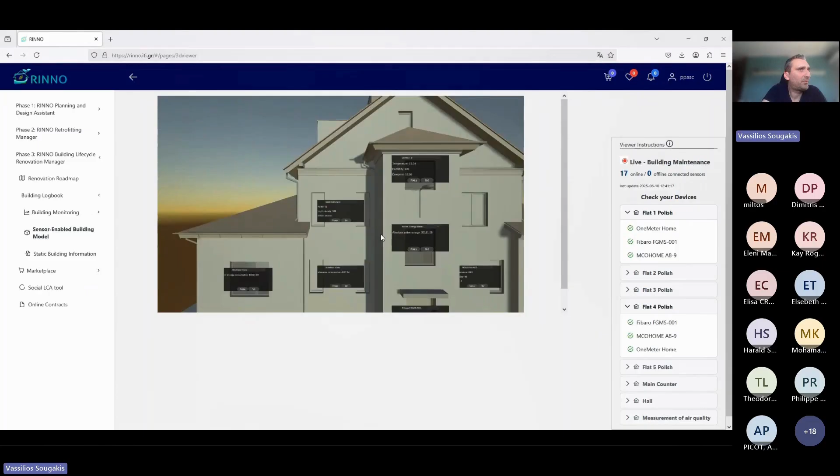We can select different flats and different readings, and it will just show us which flat it is and what are the readings, and we can change the sensor, and we can evaluate different parameters. Again, we can see the whole building.

And finally, the last component, which is included in the building logbook, is also used as a repository of additional information. So apart from the information that the user may provide, we can also upload here and use it to store online all the data regarding the building, such as the energy performance certificate. We can upload PDF drawings. We can upload the BIM file. So this is another component for storing the building information in the platform of the renovation passport.

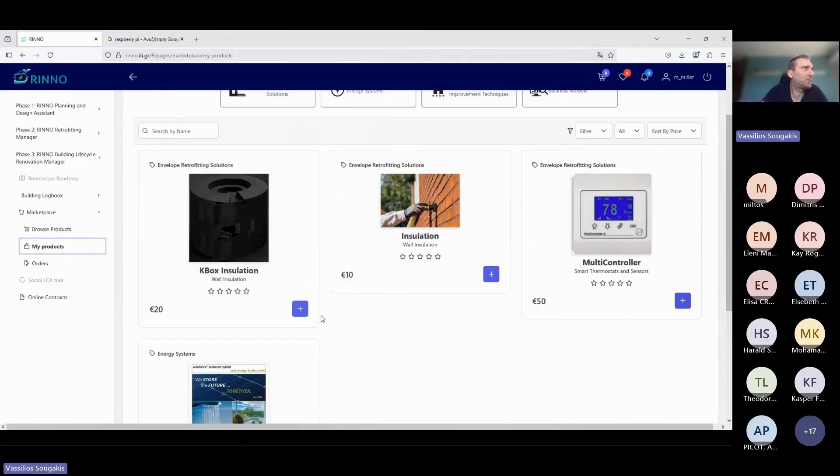Now the next part of this lifecycle renovation manager is the marketplace. So the marketplace is a component that has been developed in order to enable companies to upload their products and be able to sell them through the RINNO platform.

So what we see here is, let's say, a technology provider which can access the RINNO suite and enter information and also include the product in the marketplace in order to be sold to potential users. So we have users that are using the platform for conducting the analysis. We have users for uploading their information, their products. We have users who are using it in order to purchase products.

So here we show the process of how a technology provider might use the platform in order to upload their products and include information regarding what category the product is, what the product use is, and then an image, and also obviously the price and estimated delivery time.

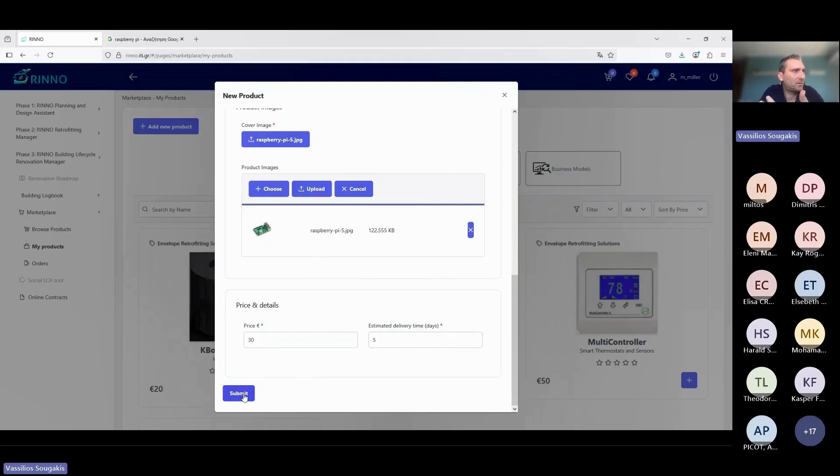So once we do this process, the product is now added to the marketplace under the relevant product category. And then the user can also review it, first to publish it, and then it's live in order to be purchased by RINNO users. They can also review the information. They can edit it, change some characteristics, and update the product that they use.

So now it includes another image as well. Once the product is uploaded, you can also click here and view the images of how the product looks and how it is delivered.

So once they're happy, the product now is uploaded in the RINNO suite, and then this is another user which also has access to the marketplace, but now they can only purchase products. They have a different account, and they're not technology providers, so they don't have the functionality of uploading a product, but they have the ability to review different products under different product categories, as we see here, and proceed to ordering and purchasing a product from the RINNO suite.

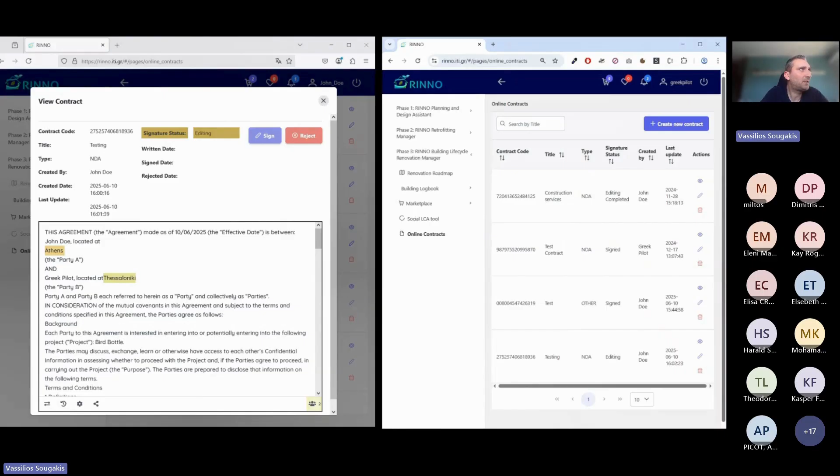So both of them are finished with editing. And once they're finished with editing the contract, then they're able to sign it. So they can review the changes that each party made, and then if they're happy, they can sign it or reject it. In this case, the first person signed it. Now the second person has also signed it. And now the contract appears as signed. So the process has finished.

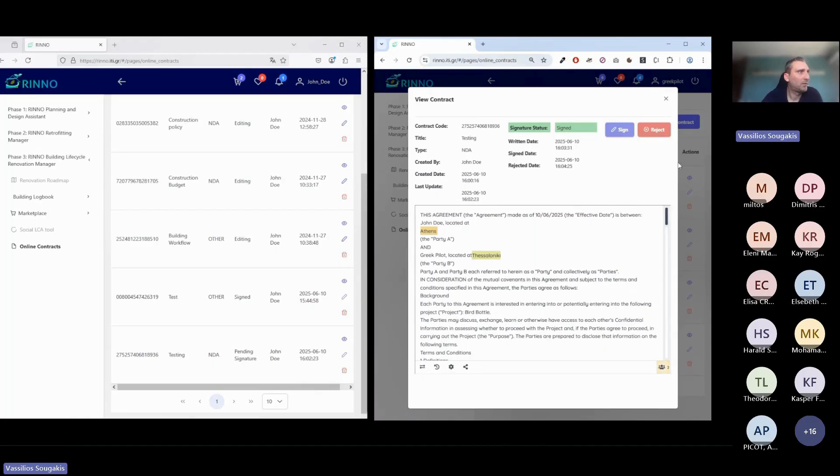The same will appear, if I refresh, on the second party as well. So we have two parties, they're working together at the same time, they can directly chat, and they can easily sign an agreement, they can communicate, they can review all the changes at the same time, and this is expected to speed up the process of signing such NDA agreements and facilitating the cooperation between different parties.

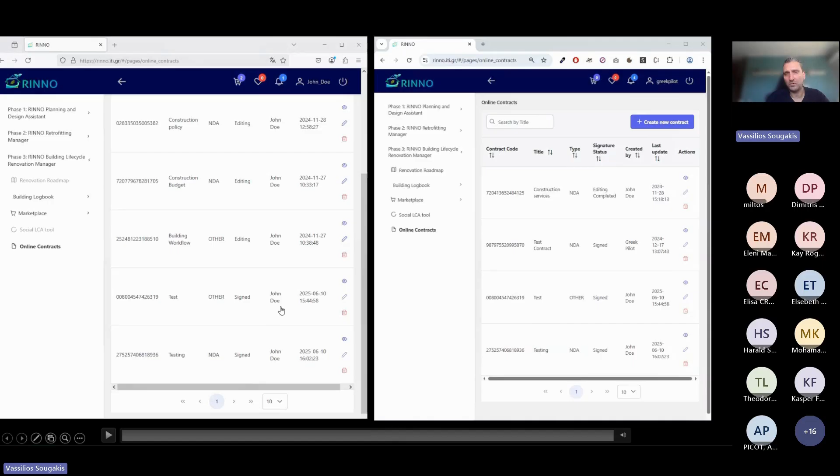So this concludes the presentation of the tools for the Lifecycle Renovation Manager as well. Thank you. I think we can proceed to the next stage of the agenda.

Yes, thank you very much, Vassilios, and also Alexandre and Christian for your presentations. And yes, the next step in the agenda is discussion time, so questions and answers. So if there are some questions, please feel free to ask. Yes, please, Elsebeth.

Yes, first of all, thank you very, very much for the presentation. I think it was very easy to understand what the use of these tools is, and that's really great. One thing I wonder, if you could just say two words on who you expect to use it. I was just considering it's not the same person using all the tools. It differs from tool to tool, or how do you see that?